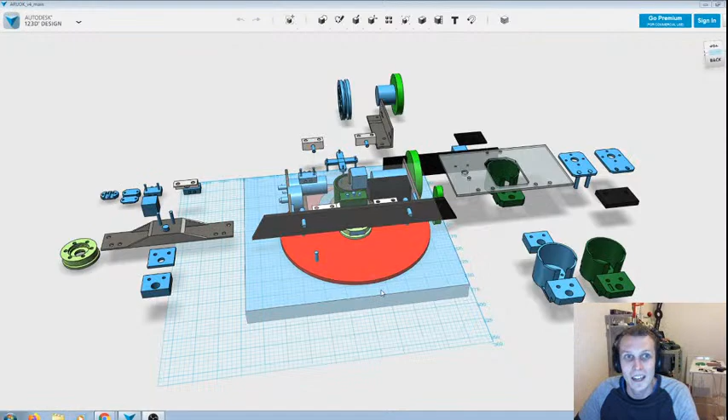So, we're going to be working on Annie, Are You OK today.

Now, before we get going, I will talk about the CAD program that I'm using. This is a program called 123D Design. It is not something that you can get anymore because Autodesk, the people who made it, don't support it anymore. And yeah, I use it because I'm a visual thinker. Like, a lot of the mess that you see here is me looking at Annie and building everything in parts and kind of mashing them together to see how they fit inside here.

Now, I do use Fusion 360 a fair amount, but to get a good idea of how all of the parts go together and kind of mesh in place, I use 123D Design. Everything that I've ever done starts in 123D because it's how it works in my head. Like this black blob in here, this is Annie's weapon motor, and I can pull this out and mess around with it, and I can see that it's going to fit inside the middle section of this. Yes, I understand that Fusion is really good, but Fusion doesn't work with my style of CAD and thinking.

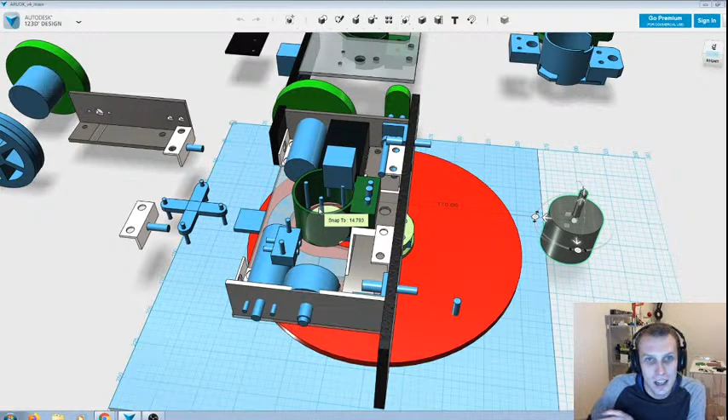Now, for those of you who saw the video on Annie, you'll know why we're here. We are here because this front plate, which there's two copies of at the moment, warped and bent. So the first thing we're going to do is actually look at doing a replacement for this.

Now, I'm going to see if I can pop up a side cam here. One of my technical difficulties was that the camera I wanted to use for that didn't actually work. So I've got a fairly dodgy old webcam here. So we'll see if we can throw that up on screen. Hang on. Oh yeah, this is a really dodgy old webcam.

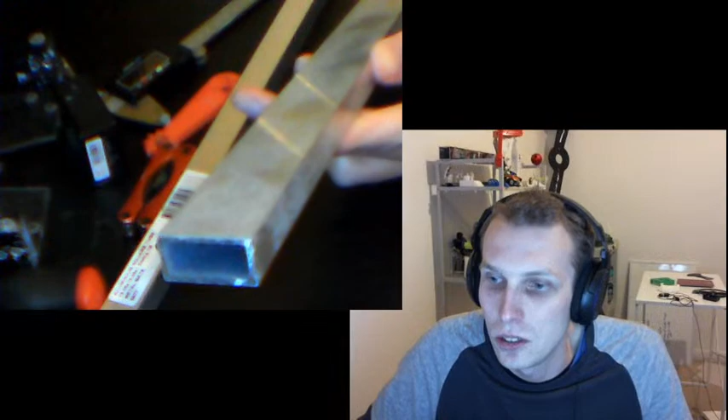We might not be using this camera too much, but this is what I want to use. It's 19 mil aluminium bar section, and this is what we were using, this stuff here, which is more of a rectangle. Now, getting this into Annie was a real pain because I did a lot of work to manually shape this into the cross pieces that you see up here. You can see there's some cuts and bits and pieces that had to go into this stuff to make this bar into that shape, so I'm hoping to avoid some of that effort and work this time.

Yes, it must be unbendable, but that's why we're using tube this time, and we're hopefully going to use this tube without cutting into it at all. Because this tube as is, without any cuts in it, just with holes drilled through, is going to be way stronger than the 2 mil flat that ended up being the edges of this guy here.

Now, as you can see, there's lots of different holes put in here. This is kind of from the different iterations of Annie. Over the years, I have a couple of them here, actually. I'll just throw some stuff around and we'll go back to the really terrible camera. There we go. Oh, where is that camera? It's about here. So this here is Annie versions 1 and 2.

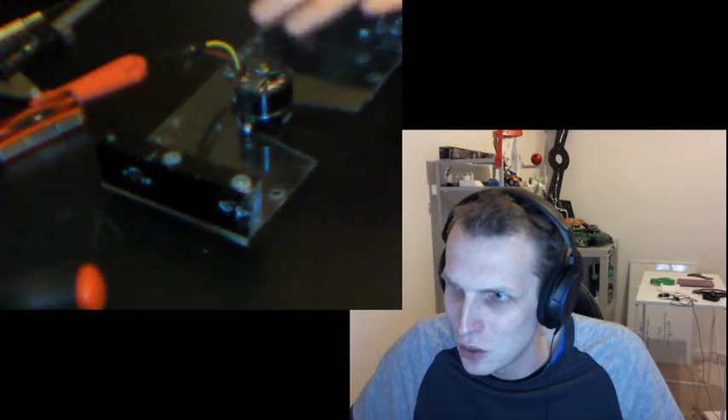It has parts that are the same and parts that are not the same. This is an older version. And then next to me in a box of bits, I have Annie version 3 and 4, which is the one that had the issue. Both of them have had issues. Come here, Annie.

Yes, unbendable, that is definitely what we're going for. So that's Annie versions 1 and 2, and then this whole mess is Annie version 3 and 4. And kind of what we're going for today is like a 4.5 almost. I'm going to be keeping a lot of this the same, and then just using the bar stock.

Yeah, so I've got a bit of a dynasty of Annie going on here. I don't know, I like the version 1 chassis still. I mean, it was a terrible chassis, it didn't really work.

But it's nice to have at hand. So the first thing I need to do is work out what my tube stock actually is. And 19 by 19 by 1.2, okay, so that's actually pretty thin-walled, but it should do the job.

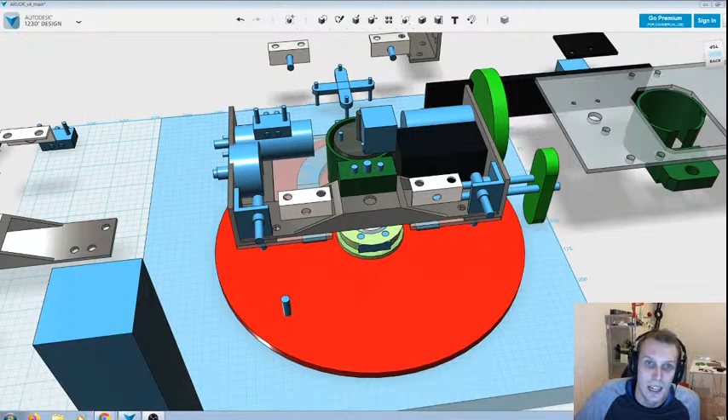Yeah, so I've realized that I was on the wrong screen. This here is our fake metal tube, and there's a couple of different ways that I can get this to be the right thickness, which does look to be about 1.3. It says it's 1.2, so I'm going to go with that.

The easiest way is probably just to actually hollow this, or use the shell command. So there's a shell command, and we can just say I want this to be 1.2 wall thickness, like that.

Yes. Oh, Annie is always going to have googly eyes. There's no doubt about the fact that Annie will have googly eyes. In fact, one of the versions of Annie that I CAD'd at one point does have googly eyes in the CAD, because of course it has googly eyes.

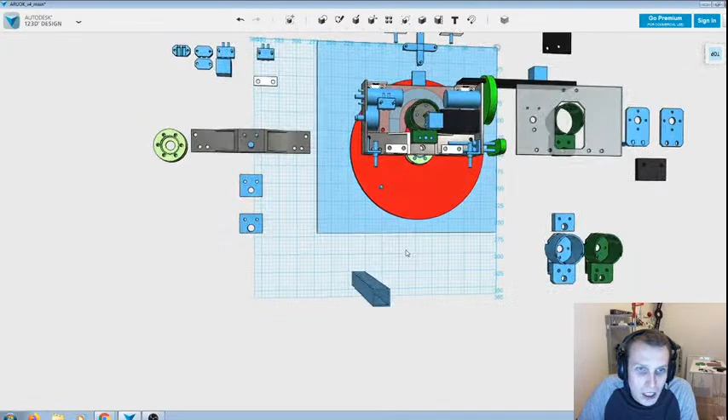So I've got our shell now, and our shell is now 1.2 mil thick all the way around the edges, but the problem is it's also got an end cap in it, so we just need to extrude that out, which is quite easy. There's an extrude command up here, extrude, bam, done. So now we have tube, just like that.

And this is part of the reason I like 123D Design. It's really, really quick to pull up different bits and pieces.

Now, the next thing we're going to do is simply snap this directly to here and then rotate it 90 degrees. And that means that this piece of tube is now perfectly centered on Annie, and we can actually now work with this and get this to fit where it needs to fit.

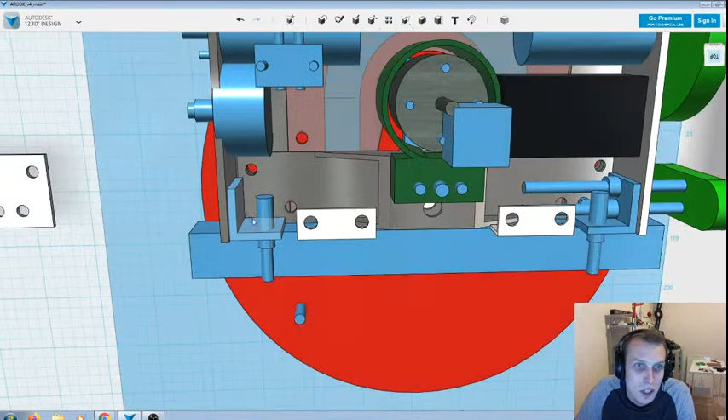So yeah, you can see in here where there are different holes. One of these holes is for the old version of Annie, and then two of these holes are for the current version of Annie. And before we're done here, there's going to be even more holes, because this 19 mil thick tube is not going to reach out to this hole at the back here. So we're going to need to cut new holes in Annie's base plate to make this work.

So the next trick is going to be getting this to actually line up properly and sit at the same height as the old one. Because from memory, these are actually different heights — the new tube is taller. So the new tube is 19, and the old tube was 15. Yeah, so this is not going to be the same height at the moment, but we can fix that.

And the easiest way to fix that is to move this up somewhere up here, grab hold of both of these, and then align them so that they sit at the same height, which is going to be, yes, that toolbar. Bam. All right, so now the bottom of those two parts is exactly the same height.

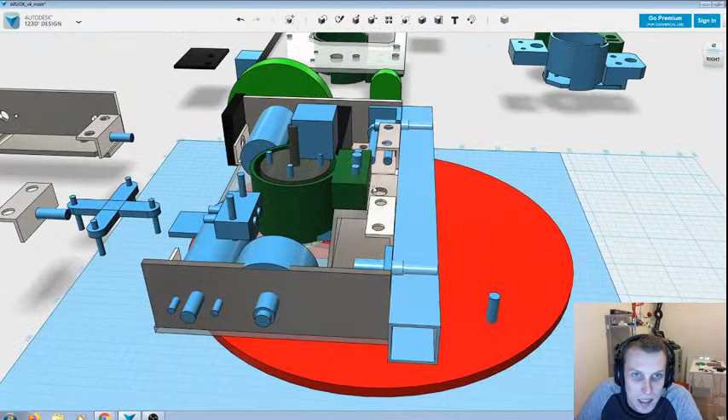And in actual fact, we should probably clean a little bit of the stuff out of here because this is getting a little bit complicated to see through. So for the moment, I've lost a toolbar. There's normally a toolbar down the side here that lets me hide and unhide things.

Well, for the moment, what we might do is take a copy of everything and just move the main important parts all the way over so that they're out of the way of everything else. We'll set this at 500 out so it's an easy measurement to get back to. So we can kind of ignore everything over here for now, and we just need to look at this bit.

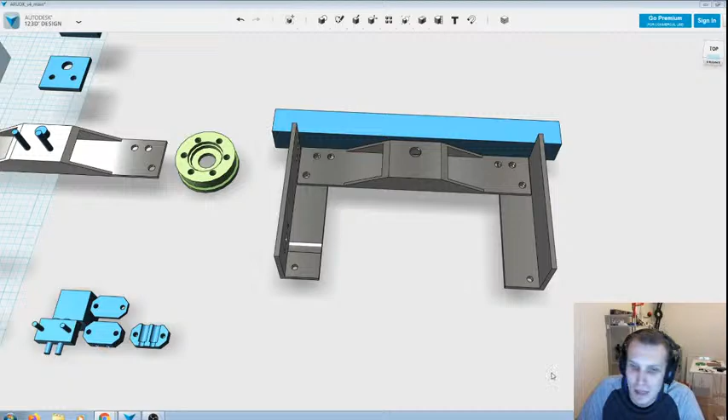Witnessing the birth of a champion. I don't know about that. We'll find out. It's a case of whether or not this new setup is going to be strong enough to hold the weapon in place.

So actually there should be a weapon axle around here somewhere. Or maybe there's not, maybe I'll need to cut a new one of those. Yeah, it doesn't look like there's a weapon axle buried in here anywhere. Unless I've got it hidden this way. Nope, okay, oh there's a weapon axle right there.

That's what we need. The next thing we just need to work out is how far away to move this. So this goes 260, cool. All right, so that's the weapon axle. The weapon axle is important because we need to know where that is going to sit in this new piece. And if we then move this back 19 mil, you can see that's where that's going to need to sit to be faced up with the rest of all of these parts.

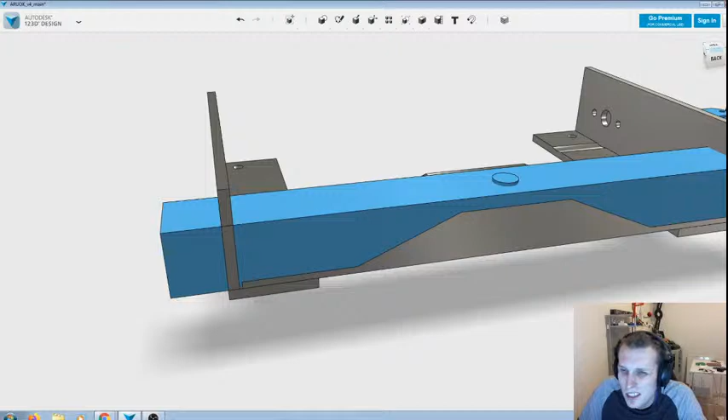Just having a look at chat. Yeah, no it's not midnight in Australia. It's the latest as it is anywhere in Australia is 10? No, 9:30, something like that.

Yeah, I'm also really hoping that Battlebots Season 3 happens. Battlebots was just an amazing time. I'm really, really keen for Battlebots Season 3 to happen. And hopefully they decide that Annie wants to go there.

So is it possible to make a carbon fiber disc for Annie? Ugh, I don't like the idea of carbon fiber in weapons. Just, yeah. Weapons always take massive, massive impacts. And I know carbon fiber is kind of good at that, but I feel like if you hit carbon fiber wrong, it's going to explode, and that's not going to be a good idea.

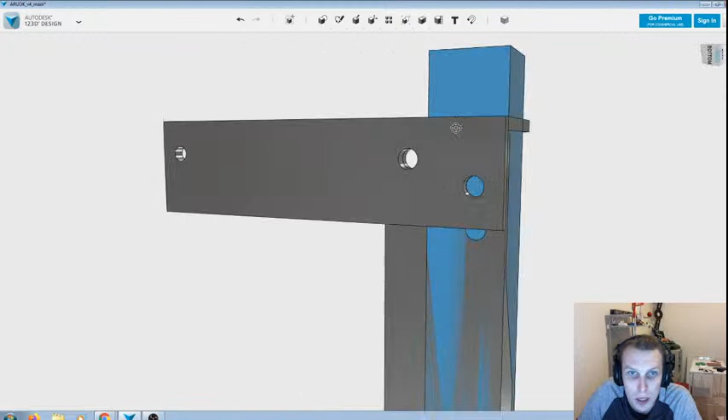All right, so back into the CAD stuff. So we're seeing at the moment that from the looks of things, we've got one of our holes lines up into our 19mm tube. The other one doesn't, which is what I was expecting coming into this. And then we need to cut down the tube as well, because at the moment it's way too long. And also we should just right now cut the weapon axle into it. So we'll cut that weapon axle out, and that gives us the weapon axle hole like that.

Actually I'm going to put this into the middle of the robot there. Now one of the tricks I did in Annie this time round, and actually it's got to be around here somewhere, it's got to be somewhere in this CAD. I actually put a 3D print inside this tube section so that I could bolt into it, and also so that I didn't crush the tube down when I compressed the weapon stack into it. So we're going to be doing that again, and I'm just making sure that we've got enough space inside here to do that. I'm pretty sure there is, to be honest.

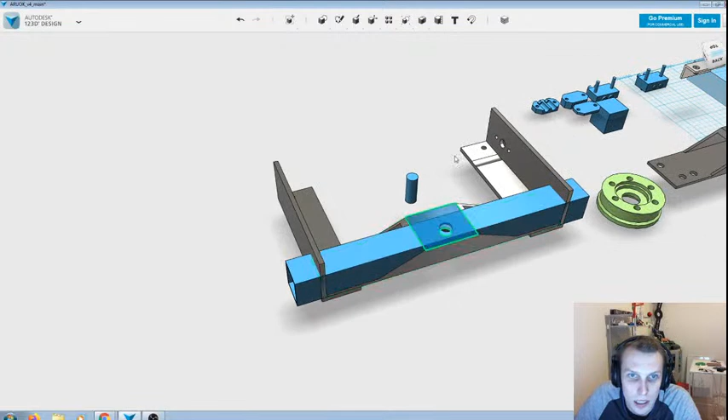Yeah, so next thing I think is actually we're going to move this guy out of the way because we don't really need this anymore. That was literally just a guide, and it's weak and old.

And yes, I'm very, very keen for Battlebots Season 3, specifically to get revenge on Daedalus and Clause 2. I've already cooked up a weird idea for how I'm going to get revenge on Clause 2. To do it though, I'm going to need a mini bot in the arena, and that's all I'm going to say about that, because it's a kind of crazy off the wall notion, which I'm just crossing my fingers and hoping it's going to work.

But it's something that, like I said, if Battlebots Season 3 gets announced, I will work on the mini bot on the channel probably, and then I'll attempt it in a fight before I actually go to Battlebots, because you've always got to test these things. There's no point just building a mini bot and taking it with me and then trying it there. Like I want to know that it's going to make some difference.

So yeah, and yes, anybody who has a beetle out there, do try and enter Battlebots, because the more of us that enter, the stronger the field that they can select, and the better that's going to be for all of us. Even if somebody out there takes my spot, takes Annie's spot at Battlebots Season 3, that will happen because they're a stronger competitor, and that's going to be great. That's going to be great for Battlebots. So do it, go ahead.

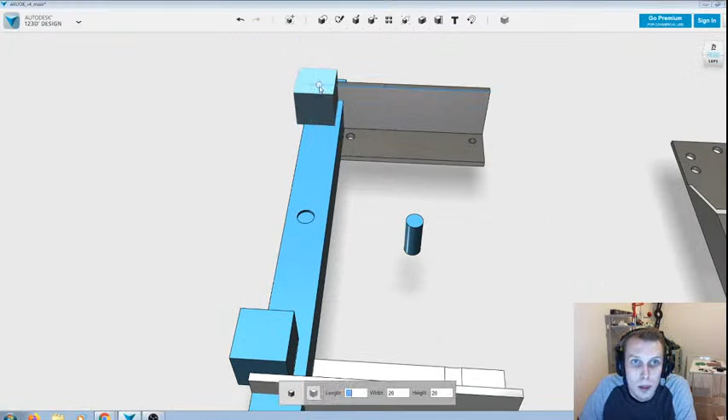Yeah, I did get a little bit unlucky at Battlebots, but part of the unluckiness was my fault, right? Annie didn't work as well as she could have worked. Her weapon went out a couple of times, and to be honest, Annie's weapon problems are something that I've been dealing with this whole time. So it's something that I knew about and I need to work on anyway. And that's kind of what we're doing today, right? We're doing an upgrade that will hopefully make the weapon stack up better.

All right, so the next thing I'm doing here: I've got my 19mm tube in, I've got the hole cut for the weapon axle. I'm now going to cut this down to length using some splits. So we'll just face this up and split it, and then we can delete that bit out, and that leaves that perfectly flush. In the real world, I'm probably not going to cut this to exactly whatever this comes out to be. That's not what I wanted to do. Give me that, and split that there. Boom, boom, boom. So if we look at the new length of this piece, we're at 163.6. So I'll probably cut it at 163 just to give me a little bit of wiggle room.

Oh, downforce is the mini bot. That's an interesting idea. I do like that. It might not be exactly downforce, but I do have the little fan out of those wall climbing cars still. So I could build an even smaller downforce if I really wanted to, which could be quite interesting.

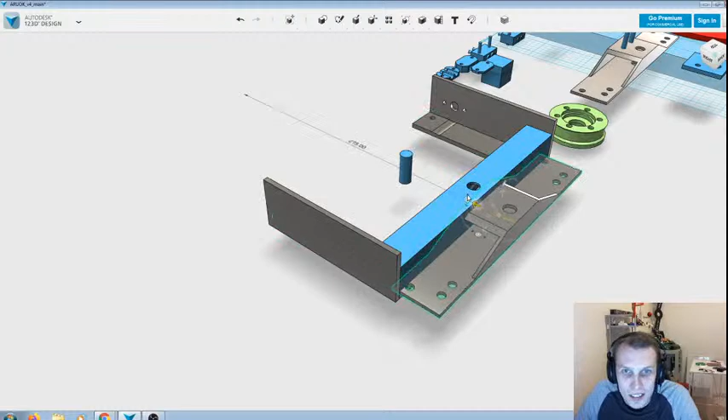Okay, so we've now got the new tube in here, which honestly is looking chunky and substantial. Look at it compared to the old guy. The old guy looks kind of weak in comparison. Look at that. Because the new tube is a thinner wall tube, I'm hoping that I'm going to get a bit of a weight reduction out of this, because I didn't have a lot of weight left in Annie that I could play around with. Actually, I'm not going to do it that way. I'm going to do it that way. Go away. There we go. Okay. So that's that new tube.

Now, the next thing is going to be putting holes in here. So we've got M5 bolts going through the bottom. So I need to work out how to get another M5 bolt in here without destroying this tube, and make that work so that these things aren't too close together and all of that fun stuff. So I think the first thing I'm going to do is put the M5 holes into the tube. There's an easy way to do that, which is the way I'm going to do it.

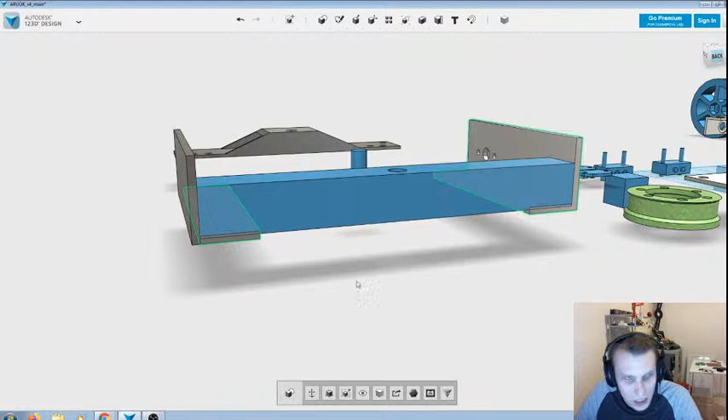So we need to copy the... Whoa, okay, that's interesting. That L-shaped piece is not actually an L-shaped piece. That's very weird. Maybe I cut that accidentally before. We'll just copy those, and then we're going to subtract them out of our body. Like this, like this, like this. Actually, we're going to go back up. Nope. By 1 mil. Give me 1 mil. That's 2. All right, we'll do this manually. And then we'll move this guy out by 20. And in under here, we've got some perfect cutaways that give us our bolt positions.

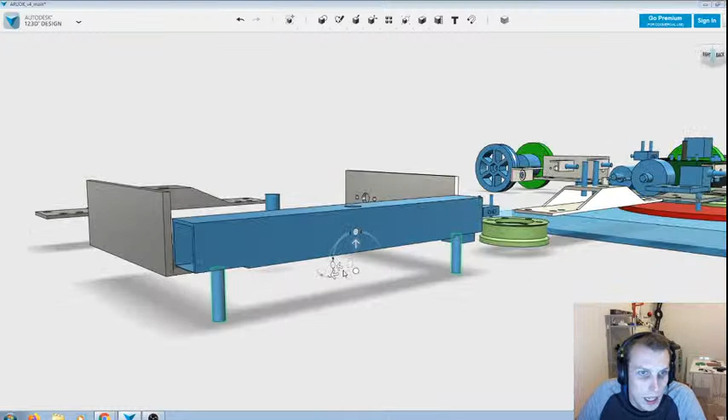So if I 2.5 and copy that. I'm going relatively quickly with this because I'm fairly happy and confident in this software. And I'm not really attempting to teach you guys this because, of course, it's out-of-date software. So there's really no point learning this as it is at the moment. Come on, snap to there. Thank you. So we just wanted those in place for the moment. So we can do this. And then we're going to extrude that hole and up.

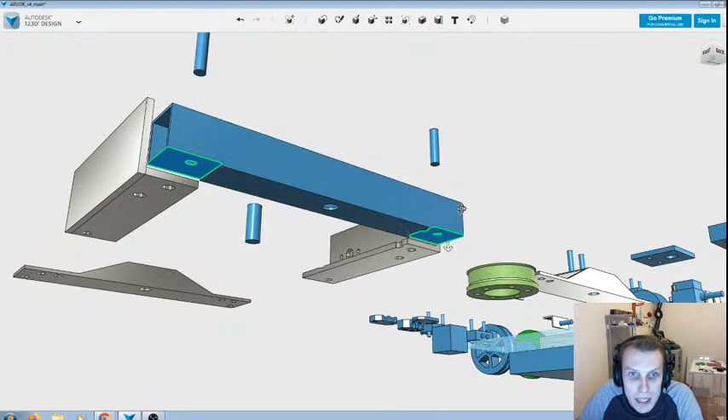Yep. Any specific reason I use this CAD software as opposed to other options? Yes. I use this CAD software in particular because it's a very visual drag and drop based setup, which is how I think. When I CAD in Fusion, I have to get an image of what I'm trying to do in my head first, because at least the way I've been taught to use Fusion, everything's based on create a sketch and then do all your 2D stuff and then extrude all your 2D features out and then do another sketch and extrude that way.

My problem is that I have a hard time taking 2D space and converting it into 3D space in my head. It needs to be 3D space in my head. So I need to do 3D space in my head, convert the 3D space into 2D space, push that into Fusion, and then do all the modifications. Whereas this stuff, everything is done in 3D space.

I very, very rarely use a sketch in here. Software is available to do that, but it's not the way this software is set up and designed to be used. So this just gels more with my flow as a CAD user than anything else. That's about it, really. I would love to be able to use Fusion a lot better than I use Fusion. I just can't.

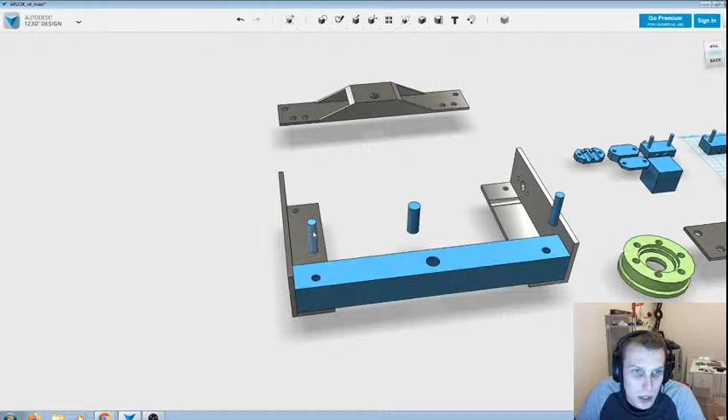All right, so we're gonna throw this guy back in. So now we've got these holes in and we've got these two pegs here, which are aligned to those holes. So the next trick I wanna do is to flick this up this way and see what I can do about working out where the next set of holes is going. Because I don't want to be too close to this, but I also don't want to be too close to this. So my real options are around about here somewhere, which is interesting. Yeah.

Annie, are you okay? And the mini bot can be called Smooth Criminal. It might be called Smooth Criminal. I do like that idea. I really do.

That's why I use SketchUp for all my bots, because they're much easier to visualize in 3D than in 2D. Yeah, I get that. My only problem with SketchUp is I used SketchUp really early, when Google first put it out, and exporting out to STLs to be able to 3D print them was really wobbly and broken for a long time. I'm not sure if it's better now. I haven't used SketchUp in a very long time. If it is, cool, it'd be a good software to use. But like I said, I got burnt early, so I stopped using it basically.

That strange young man in the mirror. I do like that. Strange Young Man needs to have an update at some point as well. We might even do that on stream too if you guys want more streams in the future. Strange Young Man actually is in Fusion because it started as a collaboration project between me and a friend that I went to university with. Unfortunately, he doesn't have a lot of time to work on Strange Young Man with me anymore, but because it started as a collaboration project, it started in Fusion, so he just lives there.

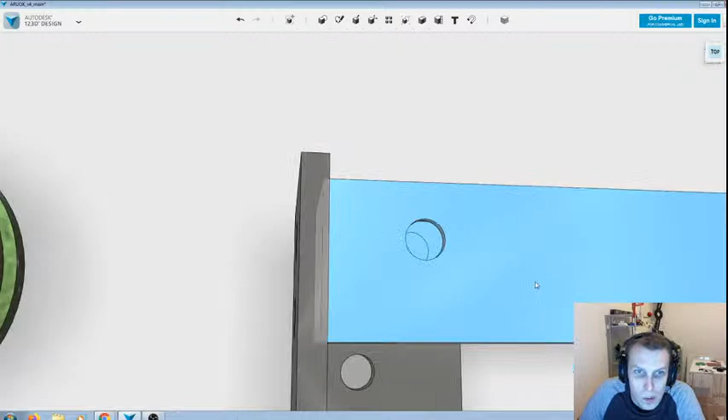So what I need to know here is how far away from the wall I am. So if I do that and then that. Okay, so we're 3 mil away from that wall. That's not too bad. That should be okay. But I don't really know exactly where this next peg is going to go. But we can have a look.

If we push it out 9 mil, is that going to touch the wall on the inside? Well, one way to find out. Let's copy it and extrude it and have a look at where the hole lines up. Because if the hole is too close to the wall, that's not going to help us. Ooh, yeah, that's touching. That's going to be an interesting one to mill, or drill a hole in. So let's not do that. Let's get rid of that.

I used to use foam core and then bend aluminium around it. Okay. Yeah, that could, yeah. Using foam core and then bending alley around foam core would be a very tedious process, I would assume. Yeah, I'm glad I live in a time where 3D printing is open, easy, and accessible.

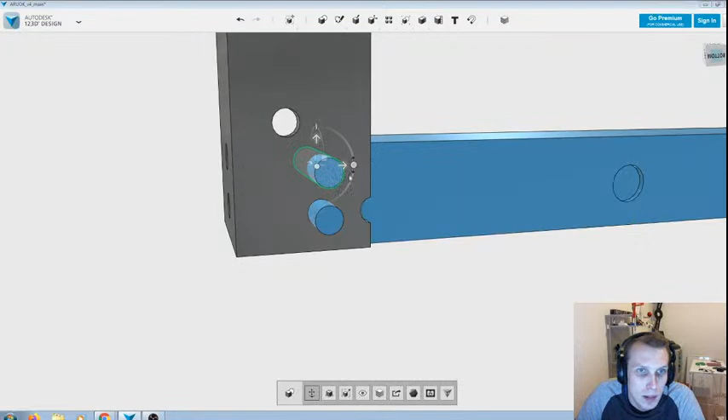So we're going to throw this guy back in by a mil, but I might also out by a couple, like 5 mil. Is that going to make any sense? How far away are these two from each other? Distance is 4 mil. Oh, is that going to be enough? That is a good question. I'm going to throw back over to the desk, although this camera is absolutely shocking.

But what I'm trying to work out right now is how thick the nuts are for an M5 bolt, because that would determine... 8.75, so 9 mil. So we need 4.5 distance between those two. Right. Okay. So that's not going to cut it. We need more distance between these two. So we're actually going to need to move over probably another... Well, if we move over 1, I think that lines us up with this hole. It's just in a little bit.

So what's our distance now? 5 mil. Beautiful. Oh, I'm on the wrong thing. There we go. Now we're back. You guys actually can't see my measurement tool, which is interesting, because there should be a measurement tool just above my face at the moment. But it's not there. Anyway, we've got 5 mil separation between our two 5 mil bolts down here, which is good. That's what we need to actually have that work.

It is going to be a bit dicey because that means that we're cutting a hole kind of close to this other hole. I guess actually it's not too bad. How far away are we? 3 mil. Yeah, all right. That'll work.

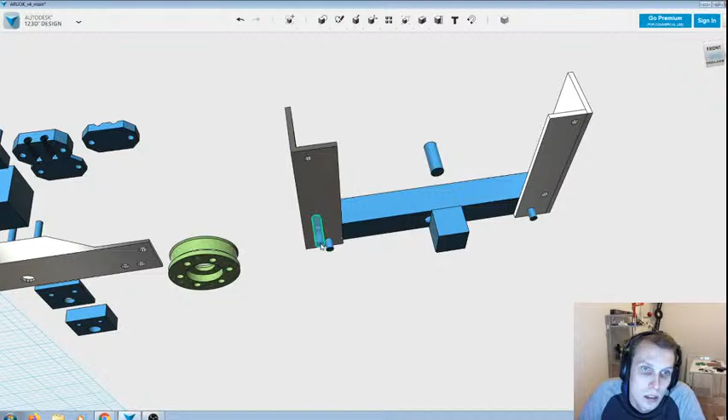Now I could go through obviously and manually move out this last one, but what I'm going to do instead is I'm going to mirror it over there. So just going to put a box in place. I know these boxes are 20 mil, so I move it 10 mil like that, and then we just mirror this guy. Where is my mirror tool? There it is. Mirror solid, mirror plane, bam, done. And that's our new bolt holes.

Yes, yeah. Well, that guy over there is not actually Bolt's weapon. It is an MDF mock-up. And I've kind of mentioned this to some people at some point. Anyway, I think part of having that MDF mock-up was actually like shooting the team in the foot a little bit, because in our application video, I swung that thing around and I didn't really do a good job of saying that it was an MDF mock-up.

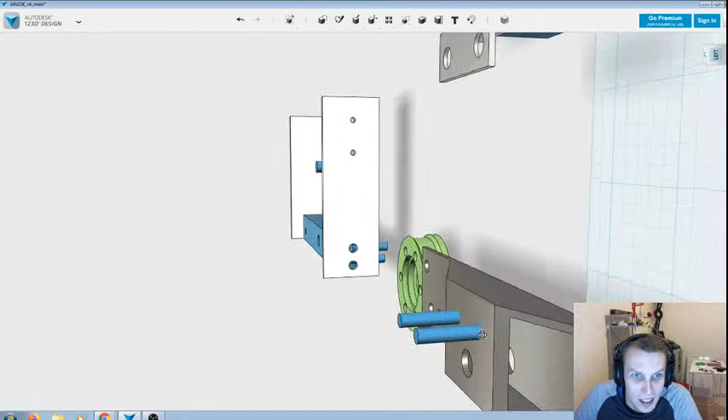So I have a feeling that some of the feedback we got, they thought that that was actually the real weapon. And they thought it was going to be weak, which, yeah, that thickness of steel in a heavyweight robot wouldn't be enough for a weapon. So I can absolutely see why they would have thought that. But yeah, that was my bad. Next time I do a mock-up weapon, I'll do it in the correct thickness and make it seem like it's heavier than it is. I'll rely on some very mediocre acting skills I've picked up along the way.

So moving back on with Annie, I'm going to grab hold of these guys and we're going to extrude down through here, which will put holes in everything for us, and then this will give us what our final bar is going to look like. So our bar is going to look a little bit like this. We're going to have two interesting holes here and here, and then our center hole for our weapon shaft. The next thing I want to do is put a 3D printed block in here again, because that actually worked out quite well last time, and I think I can do it again this time.

Yes, I do really like the lightning bolt blade. I actually have some antweight lightning bolt blades, which I'm probably going to put onto something at some point in the near future.

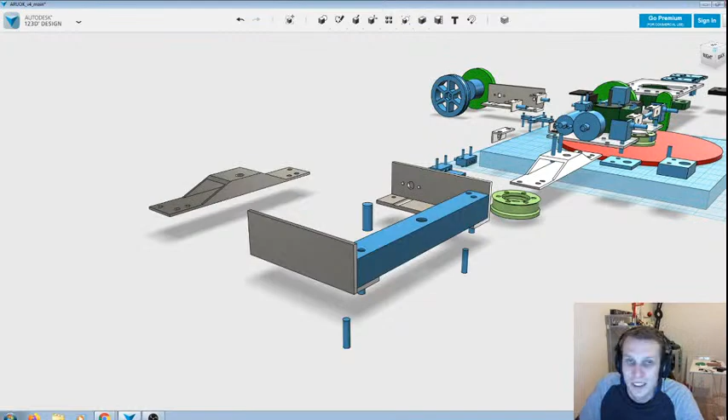Annie will be okay. We're getting there slowly. This new reinforcement piece is going to be a lot stronger. Even if I have to cut a little bit out of the back or a little bit out of the top, I'm going to try and keep all of the corners of this tube together, which is going to make this way stronger than Annie's last one. So that'll be quite good.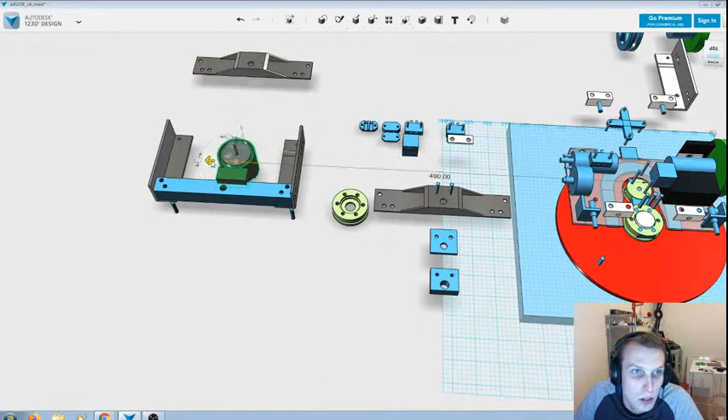Now, the next thing I want is to put something inside here, but I also need to get this guy, which is our weapon setup, or our brushless motor setup, and we need to take that over to our new location as well, because this is going to be quite important for the next part of the job. 490 there.

So you can see that because this guy was a lot thicker, the actual weapon shroud here doesn't reach anymore. So the next thing we need to do is make this all reach. We need to buff this out. And actually, I need to find... There it is. That's my weapon shaft. So I need to make sure I've got a hold of that, because we're about to cut weapon shaft holes in this guy, which is going to be quite important.

The other thing you'll see is that down here, this weapon shroud is cut off where it touched the old aluminium, and obviously that doesn't need to be like that anymore. So we'll see if 123D can deal with this. Look at that, it can.

That's nice. But we might need to change that up later anyway, because one of the things I want to try and do is have space in this weapon shroud for a bearing, and hold the weapon motor in place by having a bearing there, which would be really cool.

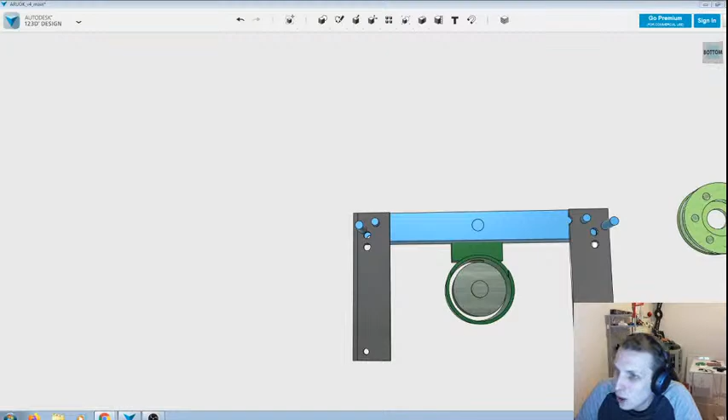Yes, I do have a video planned to talk about two of the most important things of weapon design, which are moment of inertia and weapon bite. In actual fact, that's probably going to be this week's video. It depends. I haven't quite filmed it yet, so we'll see how it comes out. It might be the week after. But there's actually Annie's weapons on my table behind me, which are in the setup for me doing that video.

Yes, so we've got the shroud for the weapon. And what we're going to do is get this shroud set up so that we can actually use it properly.

But what you need to know for now is that bite and moment of inertia are the two absolutely critical things in designing a weapon, and they fight each other. The more inertia you have in your weapon, the less bite you have, and the more bite you have, the less inertia you have. So it's all about finding a good balance, and designing weapons that are going to work for different opponents.

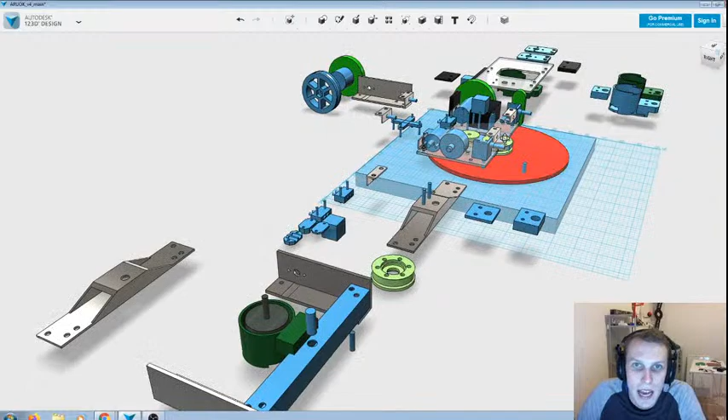Have I considered triangular shaped pieces for motor and weapon mount? Not really. Because the weapon mount itself needs to have enough space in it. So if I come over here, these guys and one underneath. These here, which I'm about to drag over, those are the bolt holes for the weapon. So to mount this weapon to this, the most straightforward way is just a straight rectangle, because you bolt either side of the weapon mount and then you bolt straight into the motor mounting points. That's basically it.

On the top, you could do a standard pair of mounting holes. But on the bottom, you could make a two-piece motor pulley and one that's fixed to the bottom mount with the bearings. And it's fixed to the bottom mount and has a bearing. Yeah, this system, it doesn't look it because this is a bit of a complicated mess, and part of the way I do designs ends up with complicated mess. But this is actually a fairly easy system, because at the moment, you've got these plates that are over here.

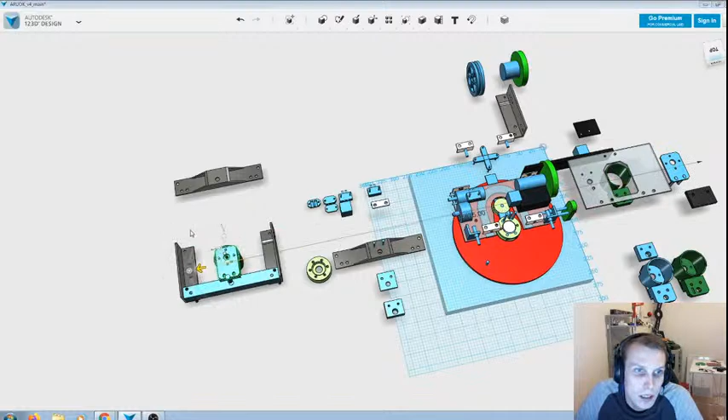These guys bolt into the motor and then bolt into the aluminium frame sections of Annie. So it's two bolts, and you can remove the motor assembly and everything, because the motor has a pulley on the underside in under here. Is that pulley even CAD-ed? I'm not sure if it is. Oh no, there it is. It's over here, a little green guy. What have I done? We can leave that stuff over there for the moment.

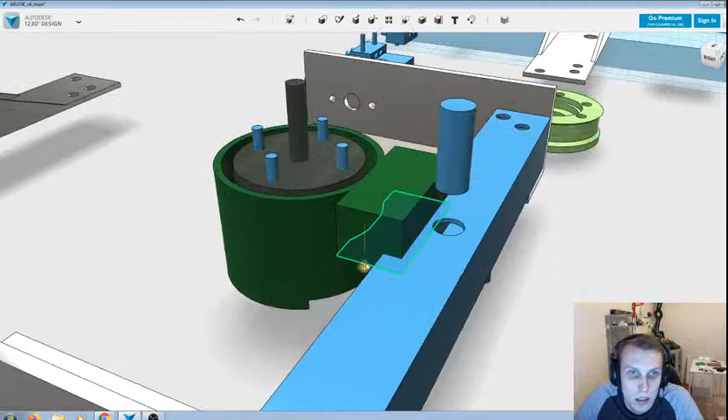Anyway, what I was doing was getting the new system done. So what I need to work out is how much clearance I need here, which doesn't look like there's much difference. 4 mil. Cool. So we're going to buff that back. 4 mil. So that's now at the right height. And we're going to need to push this forwards more, all the way out to probably there. And then we can take our weapon and extrude a hole through that. So that gives us our weapon shaft through.

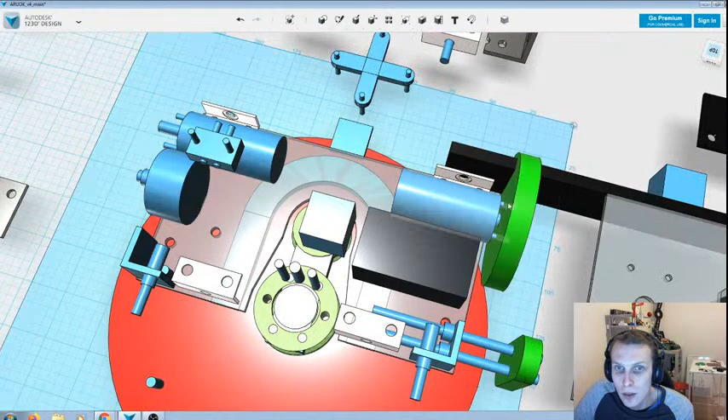The red circle underneath Annie? Oh, that's the mock-up of her blade. This big red circle is literally just the danger zone of Annie's weapon, so anything that comes into contact with that is going to be mutilated. I use it to determine that this wheel isn't going to come into contact with the weapon, because originally the whole chassis was longer this way, which meant the wheel was further away. So I had to make sure I wasn't going to touch that. And in fact, it's really quite close. 1 mil of difference between Annie's weapon and the wheel.

Which type of weapon do I like? All of them. That's a bit of a cop-out, I know. In terms of spinners, I see the reason for discs, bars, single-tooth bars, and also single-tooth discs. Although single-tooth discs are a bit of an anomaly for me; I'm not as fond of those. But the other three, there's definitely use cases for all of them, especially beetles and upwards. In ant weight classes, you're best to use a single tooth bar, because the small scale brushless motors we get these days go so fast that you really need the single tooth to get some bite.

Of all the videos I've done over the years, which one did I enjoy making the most? Oh, that's an interesting question. Three spring instantly to mind. The William Osman cat Battlebot video that I made. That was memorable because I actually had a cameraman for that, which was really interesting. I roped a friend into giving me a hand for a weekend, which was fun.

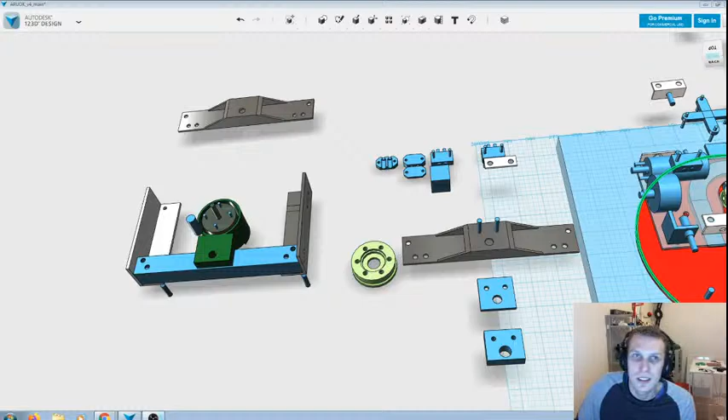I can kind of see that, and Drizzle's single tooth disc is a good one because the disc itself is a self-righting mechanism. That's the reason it's a disc rather than a single tooth bar, is because he's using that to get the self-righting going, so that's not a bad idea. It is a beast of a robot, and that is a good use of a single tooth disc. But once I get into the full scale stuff of inertia and bite and all of that, single tooth discs are kind of at odds with the principles there, so they're useful in some use cases and not others.

I'm realizing I'm just talking to you guys and ranting and not doing CAD, which is what I'm supposed to be doing. Let's do some more CAD, shall we?

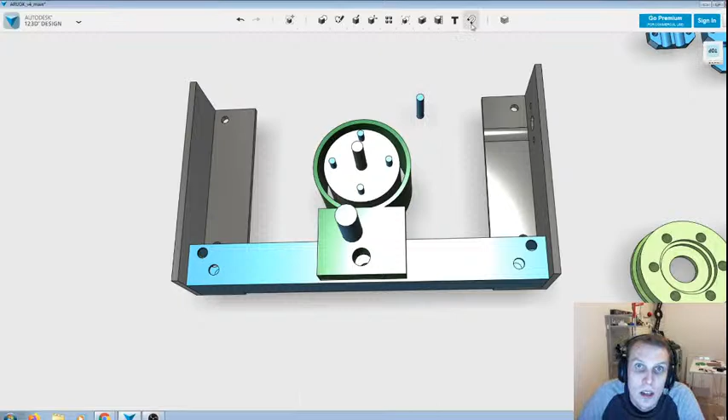So the current iteration of this uses M4 bolts from memory, to do what I need to do to hold the top plate down, and I think I want to keep that up. I just need different M4 bolts, and I'll probably just make these brand new, because if we snap that into there, that's just off center, which is kind of annoying.

This is the M4 bolts for holding the weapon mount in place, like the panel that will go across the top here and hold the weapon motor in place. If I center them on the bar, they'll be okay, but it means I'll have to do a second set of markings. So I could actually center them on the weapon axle instead. If I center them on the weapon axle like that, then the mark I make horizontally for the weapon axle, I can copy across to do the M4 bolt as well, which would be nicer, I think.

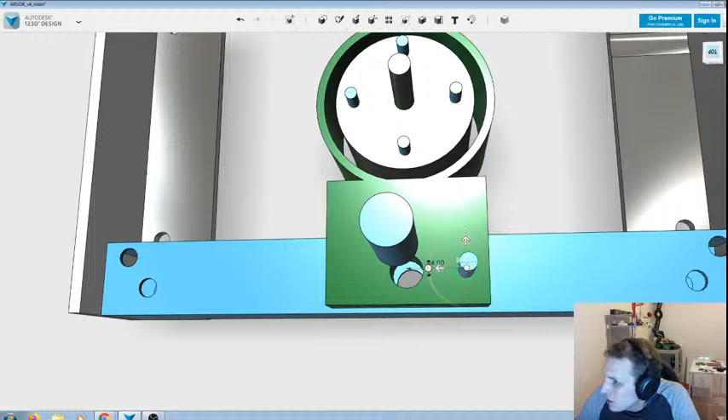Where is chat at? Single tooth discs, there are lots of other weapons. Yes, I should mention there are lots of other weapons. I do personally like spinners a lot, but I guess I'm going off them a little bit. The saw isn't really a spinner, it's more of a control bot. And I do like control bots from time to time, like Strange Young Man.

Strange Young Man is an awesome control bot, or will be when I finally get the weapon working. I don't know, I like the ability to straight knock someone out though. So lifters and flippers and things, they just don't have that unless you've got a pit or an out of the arena zone. If Robot Wars came back, which I don't think it's going to, but if it ever did, I would love to take a flipper or a lifter to Robot Wars, because the out of the arena zone is a KO, right? That gives you that big 'my weapon has successfully done the thing' moment. Yeah, I don't know, that's where I'm at the moment.

In Battlebots, who did I put down as the robot I didn't want to go up against? I don't think I did, to be honest. Because I didn't know about Daedalus going in, being an Aussie and not really watching the UK scene all that closely. I knew about Drizzle, and a lot of the people who'd been in Battlebots Season 1 I knew about. So I'm pretty sure I didn't put anybody down, because there's not a fight I didn't want to have. Even to this point, I want a 1v1 with Daedalus right now. If Battlebots Season 3 was happening right now, I would put that down as wanting to fight Daedalus.

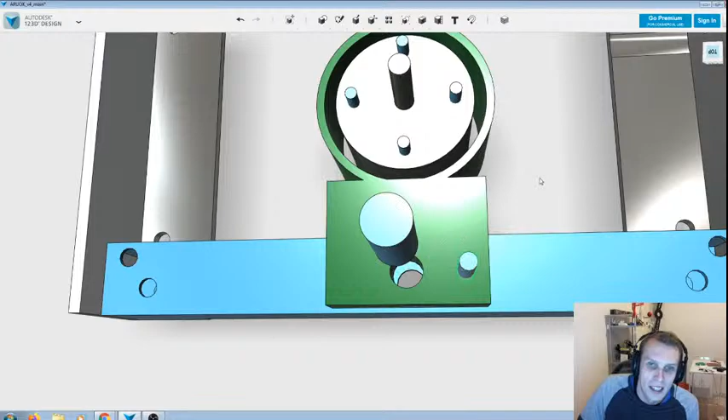Alright, where do we land on this? I think we're going to center these guys to the weapon shaft. That just makes the most sense, because it's going to make it easier to build this thing. Realistically, this is a very quick build process, because Annie needs to be ready to fight in like 2 weeks, something along those lines. So hopefully this is just going to be like, we pull this bar stock out, cut it down, drill 6 holes in it and bing, bam, boom, everything slaps together. Maybe.

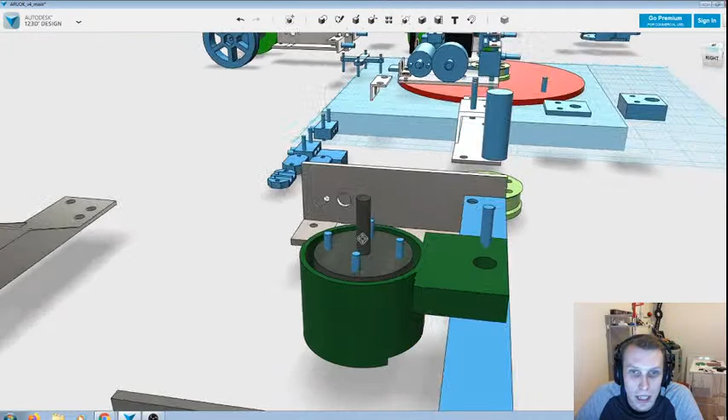Jay was really cool at Battlebots too. I was surprised, they did really, really well. I think that's kind of why a lot of people like them, because it was a very underdog story. There wasn't a lot of people expecting Jay to go very far, and they just did that anyway.

All right, next trick here I think is going to be doing the piece inside, the piece I want to 3D print that will sit inside here and give us... what do we got? 16.6. Okay, so we're going to get some frame rigidity out of this by doing 16.6 mil. Whoops, that's 1.6, I want 16.6. And probably 60, 30 will do for now. So I'm going to snap this guy inside here, which will fill that up.

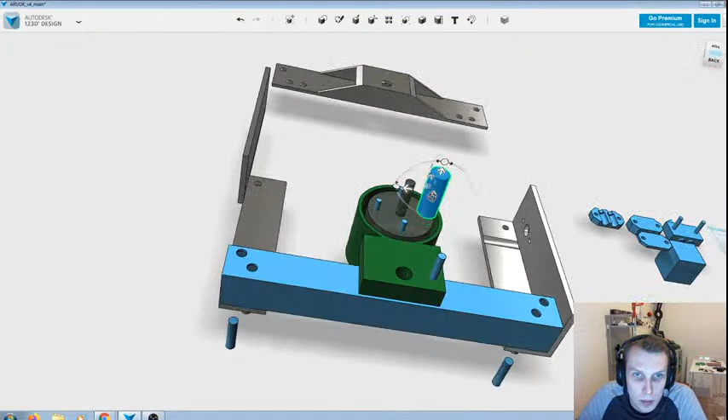Now I'm going to have to give that print tolerances when I go to print it. But the whole idea of this is that we actually cut holes in it, and then it will stop me from crushing the tube when I go to build this thing later. It also gives me a point to mount these two, because I can either put captive nuts in here, or if it's an ABS print, which is probably what it's going to be, I can tap directly into the ABS and it will just work properly.

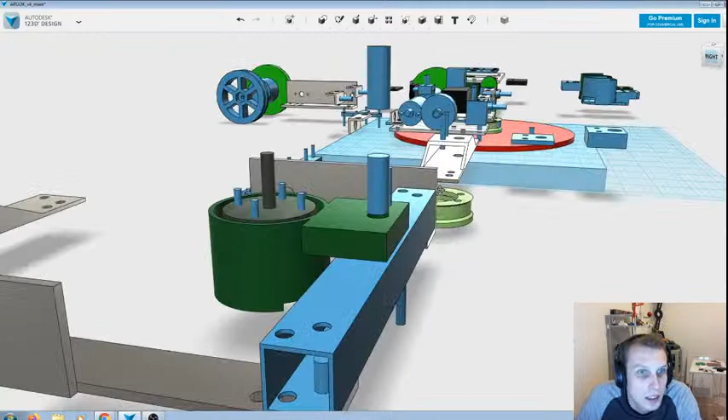Okay, so now I think we can start doing some cuts in this, which will give us some holes through that middle section. Yep, nice. And then we'll do the cuts here as well. Oh, actually we need our mirror point back so that we can mirror off this bolt hole. Mirror, mirror, mirror, there it is. That guy, bam. Cool. So now we've got our mounting points for this.

All of this is a little bit wider, so we're going to have to redo those mounting plates. But we can just extrude. Actually, we want to hold on to these as well, because we'll need to do the top plate in a second. 40 mil, done. Okay.

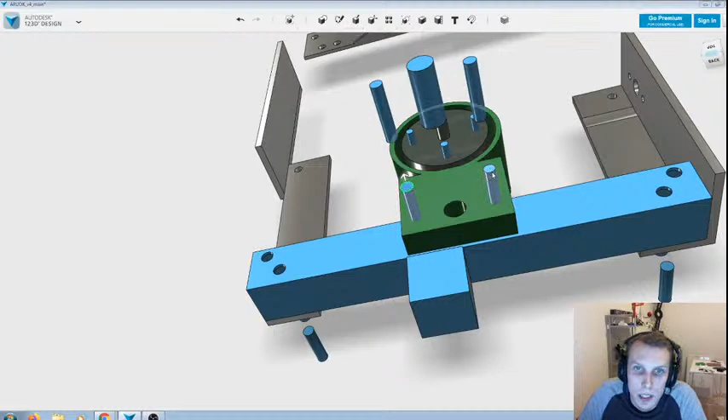Now we extrude these guys down, and that gives us somewhere to mount our weapon shroud to, or this guy off to. Although I have a feeling by the time I get to doing it, I'm gonna have to expand that shroud out just a little bit to actually fit the bearing I want to fit inside of it. So we're gonna have to cut all of this shroud off and redo it, I think, unless 123D lets me expand this.

Oh, would you look at that, we're actually going to be allowed to just expand this out. Cool, 2 mil, let's give this 2 mil. That might do the job. We'll have to have a look at that once I get the bearing in place. But there we go, so that's weapon shroud, front section.

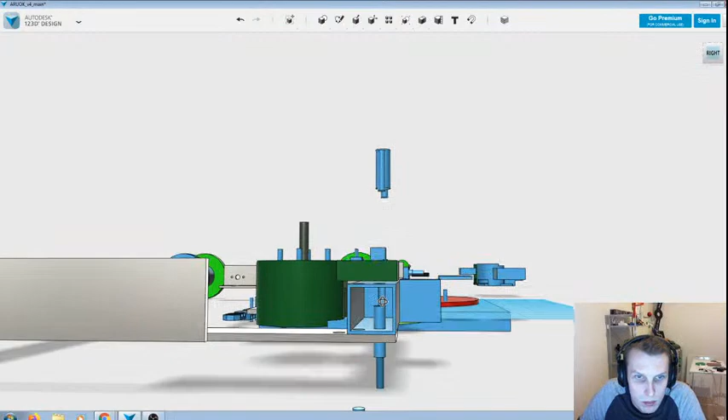Oh, whoops, that's not good. The middle piece in here, when we did our extrude, we actually cut that off, it wasn't large enough apparently. Alright, let's see if we can fix that real quick. Not sure 123D is going to be too happy with me doing it this way. Oh, it is, okay look at that. There we go, that should give it plenty of plastic either side of those bolt holes so that we can actually tap into it and work that out.

Will I put a mask on the rebuild, Annie? She won't have a mask, but she will definitely have big old googly eyes again, because I like googly eyes on Annie. She'll also have the little mouth sticker too. She can't ever go into a fight without her face. That's the rules.

Would I want to fight Death Roll? Yes, absolutely. Of course I want to fight Death Roll. Death Roll is an awesome machine. That's going to be a good fun fight. Why would I not want to fight Death Roll?

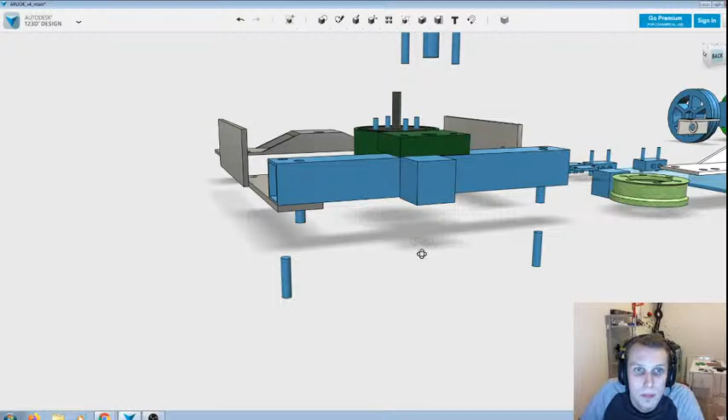Okay, so where was I at? I was at...

Finishing off that. Okay, now that we've done that, we're going to need to take one of these, our motor mount, and swing it all the way across. We're going to have to upgrade and change and improve our motor mount, because at the moment this motor mount is not going to do the job.

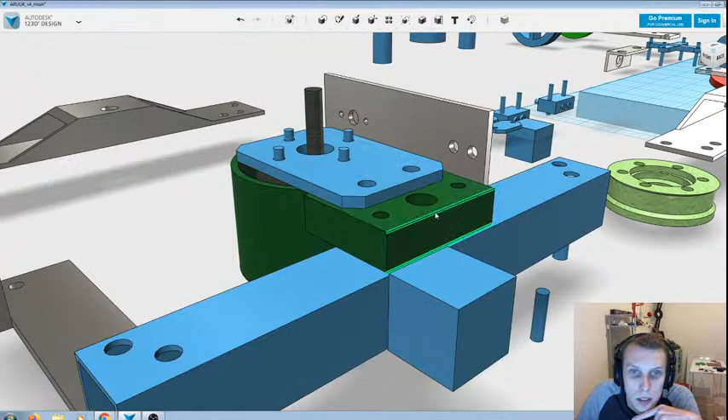Also, something's telling me we need to put some space here. So how thick is that? That's 8 mil, so only 4 mil is allowed to be above the top of this hole. That's going to make my life interesting. How thick is this at the moment? It is 9.8. Okay, so we need to make some space here.

Oh, that's going to mean the shape of this is going to have to be interesting as well. All right, well, this is something we deal with. First of all, I'm going to change this guy up, get rid of those bolt holes because they don't need to be there right now. We're going to - actually, what distance is this? Doop and doop, that's 1.5.

Yes, Jaeger looks like a really cool robot. I'm quite keen to see how they go. Who knows if they're going to fight this year? As far as I remember, they're a UK team, so UK teams getting to America in 2020 - yeah, I don't know, man. COVID has messed up a lot of that type of stuff.

And then why 123D over Fusion - I've mentioned this already, but I'll quickly refresh it. I'm a visual thinker, I like things in 3D. If they're not in 3D in my CAD program originally, I have to 3D them in my head before I put them in. Because Fusion does things in 2D and then extrudes to 3D, it takes more effort for me to design in Fusion. I do use Fusion from time to time, but I use 123D to rough out all of my designs really quickly.

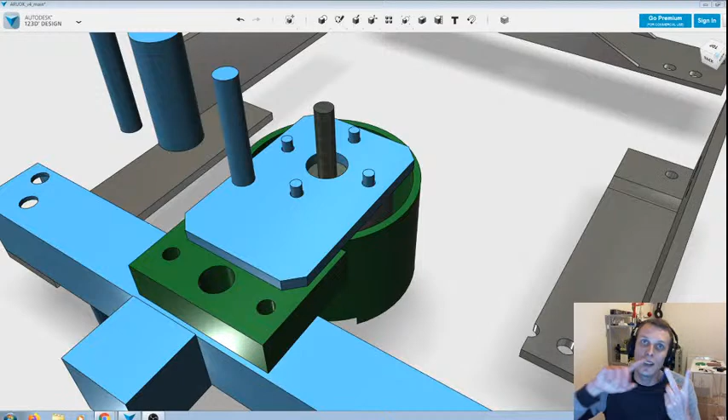So the whole Melty brain spins up, but there's also 2 active weapons, which is A, part of a uniqueness idea, and B, part of getting around Battlebots' active weapon rule. So there's a lot of process to get that thing A, working, and then B, past Battlebots' selection committee, but that's my idea right now.

Anyway, moving back on with this, we're working on the mount plate for the weapon motor here. I need to work out how much further out this needs to be. 1.5 mil. So I'm going to push this out 1.5 mil, and then push this all the way across. Whoa, that's not what I wanted to do. There we go. That's much better. How far do we need to go? 2 more mil. Okay.

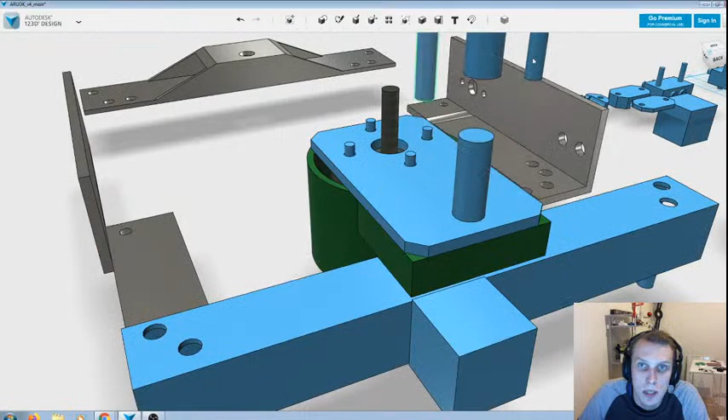So this gives me the new plate. But as I mentioned before, we need to cut out some of this. So I grab hold of this, push this down here, and make this a lot bigger. Actually, I need to make sure my bolts are out of the way of this process. Okay, those are there. I'm going to pull this shape out until it's a bit bigger, and then cut until we've got 4 mil off the base here.

So I need to work out how far away we are. We're 13 mil away, so I want to go down by 9 mil. Now we need to cut this out of all of these, so we're going to duplicate that and do some cutting. You can take that away, and you can take that away. There we go. That's now got our bolt hole where it needs to be. Probably could cut that a different shape, but for now that will work.

Hexbug's Heroes. Don't they have a weight limit on how much weight can be spinning?

Yes, so technically. But the rule with that is actually defined inside the weapon rules section. So if you read the Battlebots rules, they have lots of sub-clauses on things. And the sub-clause for spinning weapons starts with the definition of a spinning weapon, which is a weapon that is activated by a power that is not the drivetrain of the robot.

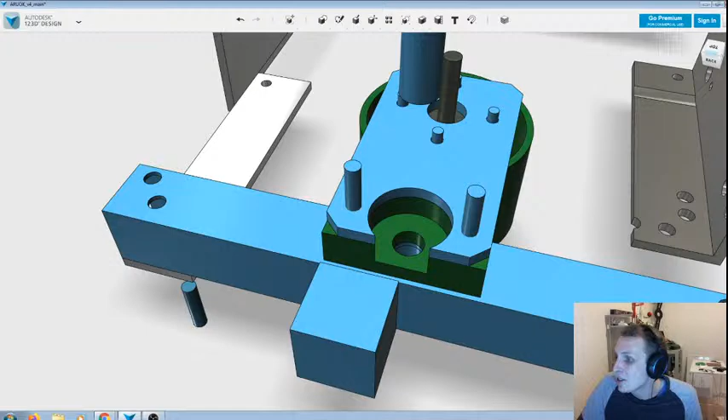You're inspired by the Melty Twin Spinner and made one in Gmod. It hits in areas you don't expect it to get. Oh, that's interesting. That's what I'm hoping. I'm hoping that with the Melty Brain spinning two spinners and itself all at the same time, it's going to just be unpredictable and it's going to catch edges of armor that nobody else will catch, that type of thing. So hopefully reality is like Gmod, because that would be awesome.

So moving on through, we're going to cut some holes in our new top plate, because this will allow us, what do I need to do? I need to copy these so I don't lose them, because you never ever want to lose a reference point when you're working very visually like this. But then we're going to subtract that, and boom, cool. So this is our new weapon mounting plate, which will probably have to be made out of carbon fiber or something. So this whole shape is probably going to get changed to just kind of angle back.

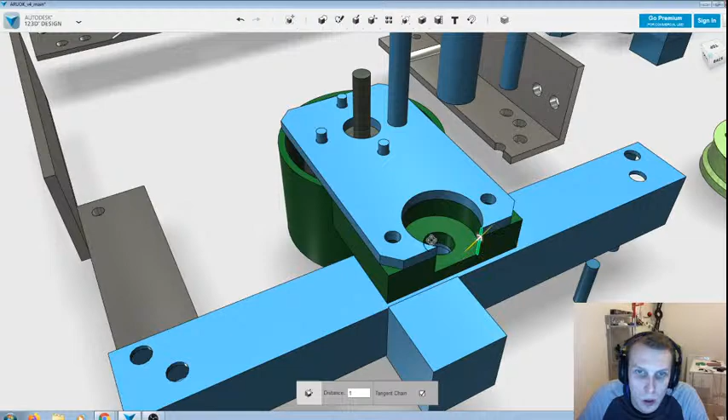In fact, I can probably just do that angling right now with a bit of the old chamfer. Can we chamfer this easily enough that it makes sense? Actually, let's chamfer all of this all at the same time. Yeah, that'll do. 8mm chamfer back. That'll work out alright, and it will look okay. Yeah, that should be the new stack up.

Hopefully, like I said, this new bar is going to be lighter than the old system over here, because if it is, we'll be fine. If it's not, then I'm going to have to find weight somewhere, which is always interesting. It's very hard to find weight in these things a lot of the time.

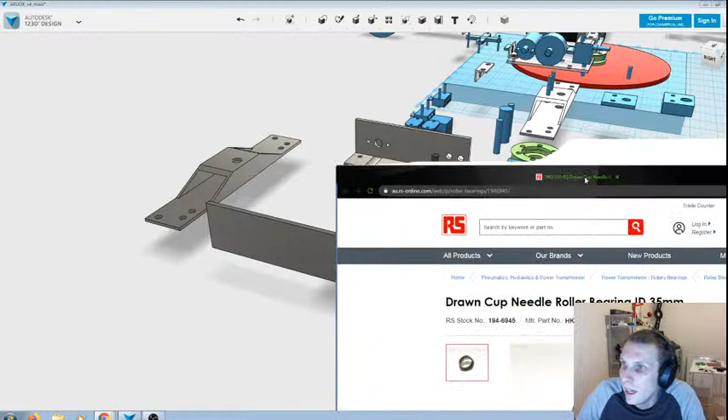Okay, so the next trick for me is actually to find the bearing that I want to use so that we can CAD the bearing in as well, and then hopefully everything will work out. We might need to adjust our shield here a little bit because that might not work with the bearing I want to put through. So let's see if this works. Is that on stream? Yes, that is on stream.

So this is the bearing I want to use, which these are the important information pieces that we need. So it's a 35mm inside diameter, which is fine. That's the size of the motor. It's a 42mm outer diameter, and it's a 16mm width. Cool. So we can make that fairly quickly in here. The only thing is making sure I've got my maths on some things right. Cool, so that's going to be 17.5. That's the inner hole.

And then the next one, what'd I say? 42, so that's 21. And the height needs to be 16. Boom, there we go. All right, so this is our bearing. There it is. Just like that. And now I should be able to go like this and go like that. And that should actually now be in semi-place.

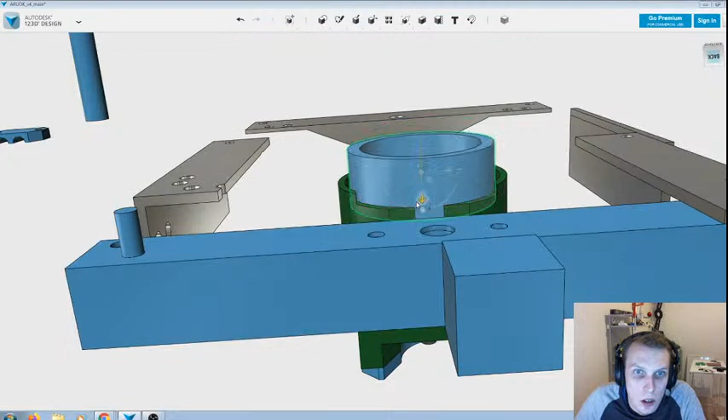All I need to do is move this down until it lines up with the bottom of this, which I think that just about does, but we might just move it up by 1 more mil. Oops, come here, bearing. You can see that's a snug fit around the motor, which is good. It's not 1 mil, it might be 0.5. Yep, cool.

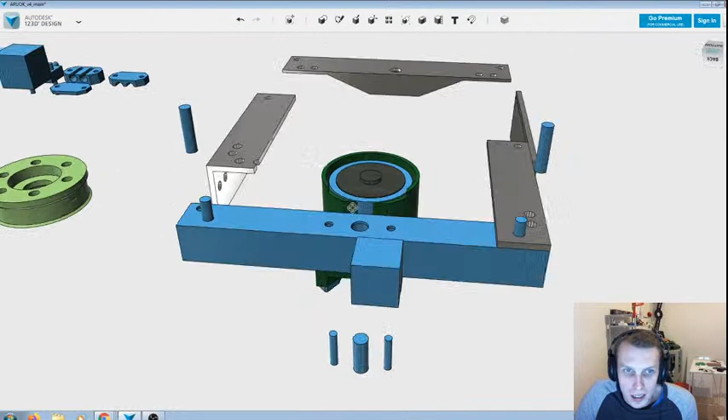I mean, the first version of Annie was bad, like really, really, really bad. The weapon was mounted through 3mm of Lexan, and that was all that was holding the weapon in place. It was an 8mm bolt through 3mm Lexan, and it first burnt the Lexan, then it broke through the Lexan, and it was a bad time all around. Yeah, but that's how I got interested in it.

And a lot of the time, the designs that I do are inspired by other people, because there's not a lot of brand new in combat robots now. There are iterations on ideas in combat robots now. And I think that's fine. I don't think there's any shame in seeing a design you're interested in and going, you know what, I want my own version of that.

I mean, copying someone part for part, 3D print for 3D print, I feel a little bit bad about that, but I haven't ever done that. But yeah, seeing somebody else's design you like and then doing a design in the same vein, I think is fine.

Yes, it is an expensive bearing, but if it takes the like 1 mil slop out of the stack up here, then it's going to be very worth it.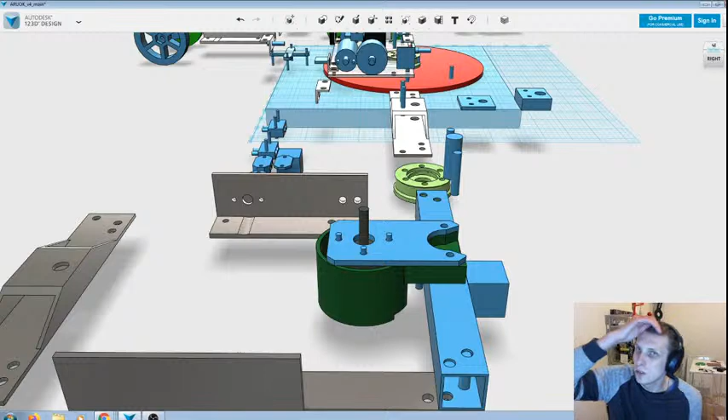Your multi-bearing concept that has a spinner on a rotating platform is kind of done with the new Ferocity. Yeah, I can see that. I mean, we're going to be going faster than Ferocity is going, as far as I know. And I think theirs is more about keeping the weapon actively pointing at somebody rather than using the robot to add impact to the weapon system. So, yeah, that's a good point.

Ferocity may have problems with that turret mechanism. The turret is going to be interesting. If they can get that strong enough, then they're putting a lot of weight into that, which means there's less weight elsewhere. So it's going to be an interesting trade-off for them. I mean, it's an engineering problem, right? And there's some good people working on that robot, so I'm sure they'll come up with something quite cool.

Hexbugs Heroes: when I messaged Robert, he said that he was taking a break from robot videos right now, but would like to come back to making a robot out of cheap $50 toys. Oh, interesting. Okay. Yeah, if he wants to take up that challenge, more power to him.

Robert does some crazy stuff in his builds, and he seems to focus a lot on perfection. Even Long Man, who was Robert's closest attempt at a joke robot, the high sheen polish that he gets on Long Man is just Robert to a T, right? And that's why people like watching his videos. Everything he puts his mind to, he does really well. So it would be very interesting to see him attempt that high level of polish out of a $50 toy car or something.

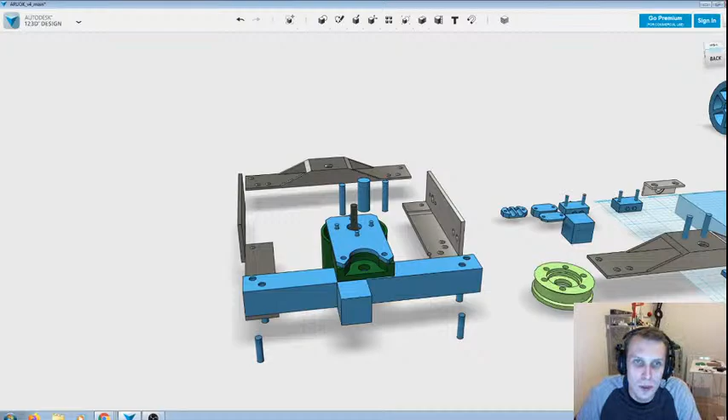It was the second iteration of Annie that fought Rumham, and Annie got annihilated. Yeah, she was still bad back then. I'm not saying that she's good now, but she's a lot better than she was back when we fought Rumham. So yes, sometimes lineage can be interesting.

All right, so how much room have we got around this bearing? Because I need to kill some of this. We have 1.5 mil around that bearing. All right, well, we're going to push this guy in probably by 1.2. So we've got space to jam the bearing in there. Cool, and then we can push the outside back in a little bit by 1. That should be all right.

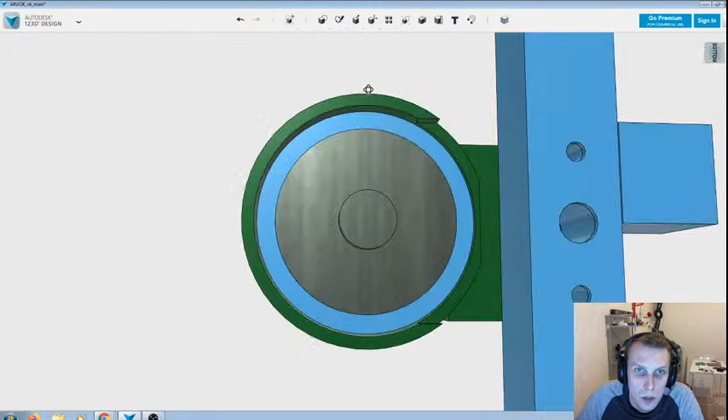I'll probably need to put some clips in here, or just some little pieces of plastic that hold that bearing in place, I reckon, because otherwise it's going to drop straight out the bottom. Because the bottom at the moment has a big hole there, as far as I remember. Let's see.

Oh, okay. It seems like there is a little bit of cover around that, which will help a little bit. I'm not sure I want the bearing to be that far down though, because if the bearing is that far down, it's starting to encroach on the belt area here, I reckon. So yeah, we don't really want the bearing to hit the belts, because if I swap back over to desk cam, which is not anybody's favorite time of the day.

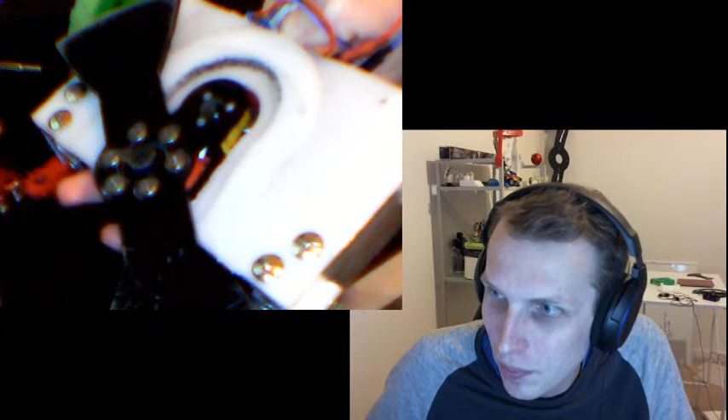Yeah, this is not really worth it. You might just be able to see up in here. No, I'm not sure you will be able to on this camera. But there's the cutout that I've made in this thing here, and the belt does basically touch that. So I don't think we want the bearing any lower than what we've got it at the moment, because otherwise it's going to hit the belt and everyone's going to be sad. Or I'm going to be sad because the weapon's not going to spin up.

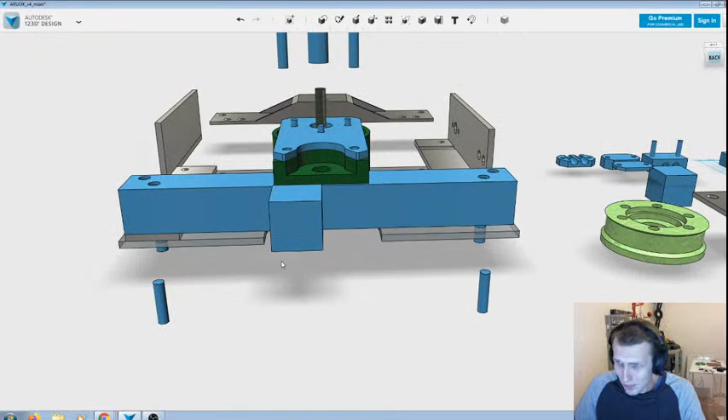Will I fight Rumham in the future? Yes. If I ever get back over to the States for a beetleweight fight, or if Rumham gets accepted into Battlebots and I get accepted into Battlebots, yeah, I'd want to fight Rumham again. Rumham is a scary beast of an undercutter, and disintegrated Annie's last weapon setup in one hit. So I would love to fight Rumham again, if only for finding out if I've actually made any improvements to Annie. If I can survive one hit against Rumham, I think I'm doing pretty good.

Can I set Annie up as an undercutter sawbot? I have been thinking about this, actually. I've got a saw blade that is the same diameter as Annie's current weapon systems, and I've been thinking about drilling holes in it so it mounts up to my weapon pulleys, because there's a couple of robots at ARC that have big chunky foam wheels, which any kind of impact weapon doesn't really do anything to. They just wobble and flex and bend out of the way. But a saw blade would just cut massive chunks out of them. So it could be quite handy to have a saw blade in my arsenal for competing at ARC. That's something I'll have a look at some point.

Yeah, Rumham would be an interesting one to have at Battlebots. I don't know if he's interested in going over to Battlebots. I really hope he is, because that would be awesome.

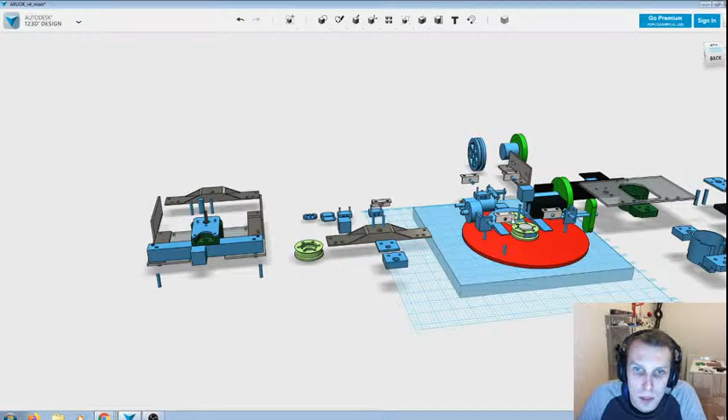Oh, also, my front plate has disappeared. I was about to look at doing some front plate stuff, but something in the interplay between the stream software and this CAD software has made it so that the button normally over on this side of the window that lets me pop back up things I've hidden has gone missing. So that's not helping me right now. But what I want to do is see... yeah, okay. That's going to be a problem.

So this little bracket here that I've just dragged over into the right spot is actually one of three that hold the top plate on. The top plate is not held on by much at all, just these three pieces here. So that's kind of annoying. I don't know what I'm going to do about that, because that's not going to fit in there, and that's about the smallest piece that I could put into that space. So, I think that's for a later date.

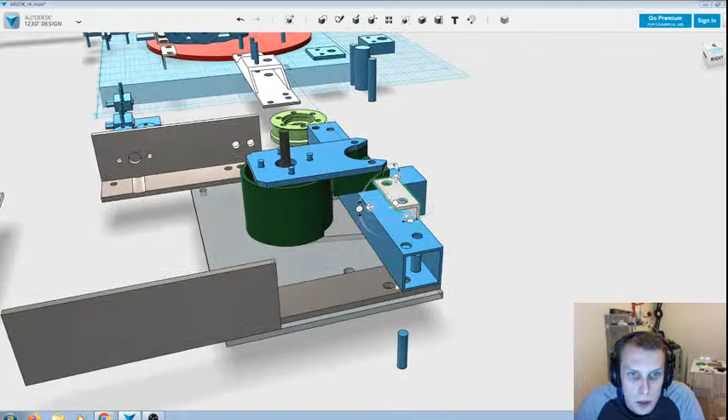I can redo the mounting positions for that, I think, because I do have a little bit of vertical space this way now, so I might actually be able to mount... Oh, where'd you go? Oh, you went back. But I might be able to change that location to be off the side wall or something. If we pull this guy back, where are you supposed to sit? 75, probably. Yeah, so we can probably put that little bracket in here somewhere and mount the top plate off of that, maybe? That could probably work.

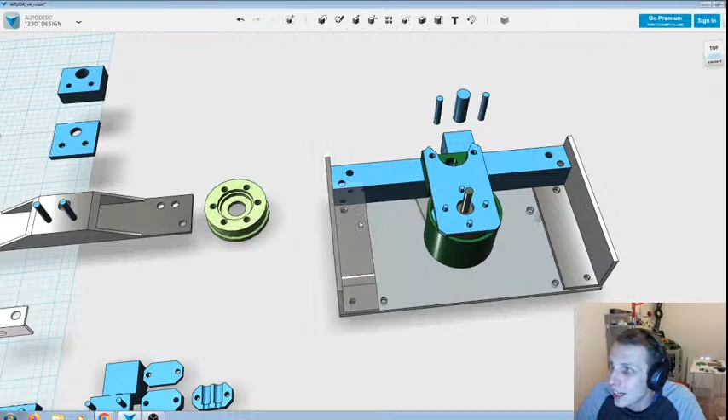I mean, you guys have seen my videos, right? I'm not huge on top plates. Top plates just kind of happen when they happen, and I don't put loads of time, effort, or thought into them, which is kind of funny considering that I'm the one taking a saw robot to ARC's next meet. So I should be the one that knows how dangerous they are and all of that kind of stuff.

All right, well, I think we're pretty close here in terms of what I can do on stream. I'm getting there. There's a lot of bits and pieces that I haven't moved over yet, but these ones are the big ones. So getting this new shield printed, that bearing bought, the new top plate made up, and then this new piece here done. Those are my next big steps. Oh, I should probably actually make the little tabs in here for this guy.

And then I think that's probably going to be it for this video. Yes, so Maximum Overdrive, I had a plan. I had a plan for Maximum Overdrive going in, and that was to run Annie Australian style, so upside down, with a disc weapon on top. Basically, the whole idea was, you want to cut me, you're cutting through the weapon.

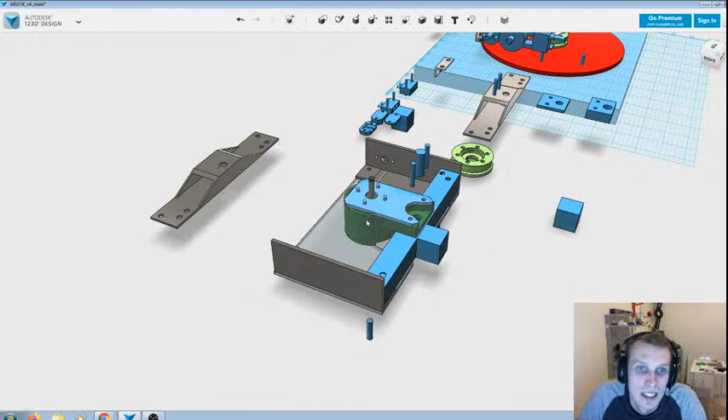And that is the way I would deal with sawbots at BattleBots, I reckon, is just flip Annie upside down, drive upside down, and just, yeah, run her as an angled overhead weapon. Might work. Maybe. And we'll get that bearing out of there too.

So pull these guys over here somewhere. And yeah, so by watching me do this, you can probably work out why the CAD kind of looks this way, right? I pull things over and I do work on the bits that I need to, and then there's too much going on, so I kind of pull things out further and further. And I do all of these at like 5 and 10 mil increments, so I can collapse all of this back right into the center over that original weapon plate. But yeah, for now, I'm just doing the stuff that I need to do.

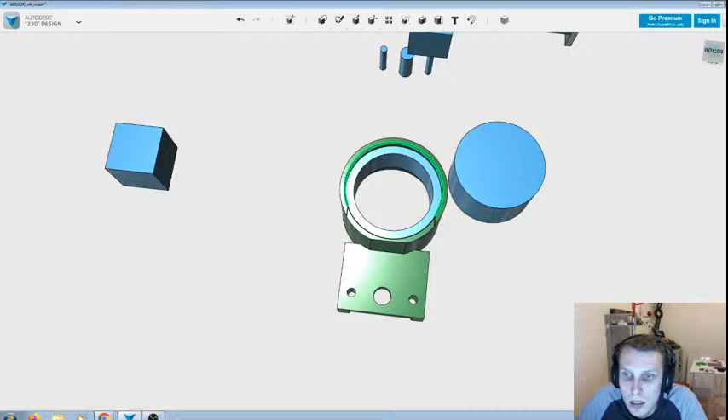So the stuff that we need to do right now is this, which is plates for that. So we need probably 2 mil tabs is probably going to be the best idea. Unless I do a ring. I could just do a ring. A 2 mil ring. So what would that actually look like? It would look like a radius of 18.5. Oops, 18.5. And then a radius. No, do that. Oh, actually, no, do that. 21.3. So 21.3, that's going to be our outside radius.

Now, I only want these tabs to be like 2 mil tall. So we can then snap that into there. Extrude this through like that. And then we'll snap that over here. So that's now our bearing retainer, or it will be in a second. Because again, where this bearing retainer is currently sitting, it's actually in the path of the belt. So what I want to do is cut this bearing retainer in half almost. Actually, I could probably get away with only 5 back. That'll do it. So if I cut this now, like this, body split, splitting entity, bam, bam.

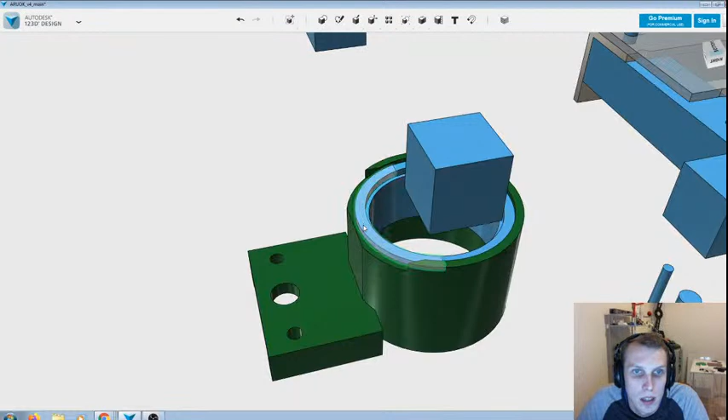Now, this little semicircle is going to be our bearing retainer. So our bearing is going to sit on there inside the actual 3D print. And all I need to do is, nope, not subtract. Don't do subtract. Come on. Do a merge. So that and bam. So this is going to be a very complicated 3D print because there's underhangs here and there, and all of these underhangs need to be exactly right. Otherwise, it doesn't do the jobs that it needs to do, but it should be okay, actually. Printer should be able to handle that.

If not, I might have to chamfer this a little bit, and then the bearing might move just a little bit in terms of where it actually sits, but as long as it doesn't sit further down than any of this, then we'll be fine. It should be totally okay.